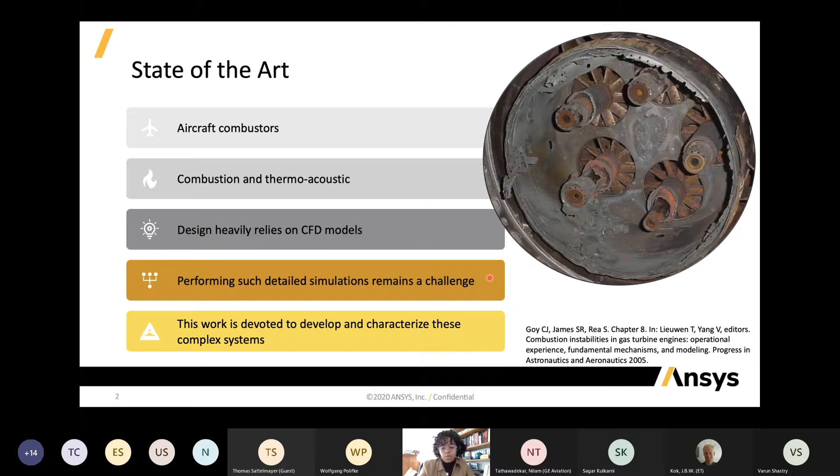Then my work here is devoted to develop and characterize those complex systems. My main focus is the combustion modeling and coupling with thermoacoustics, which are those unstable damaging behaviors. This thermoacoustic instability is derived from velocity disturbances that cause flame speed and burning area perturbations, causing also heat release oscillations inside of the machine, which also will come back leading to velocity disturbances.

This problem is not only present in big systems like combustors, but also in simple systems like domestic boilers or laminar flames, such as the inverted conical flame. And as previously said, it relies on dozens of chemical species for the combustion side, leading to high computational burden. And I will be here presenting the use of CFD and, as perspective, use of reduced order models to predict this flame behavior.

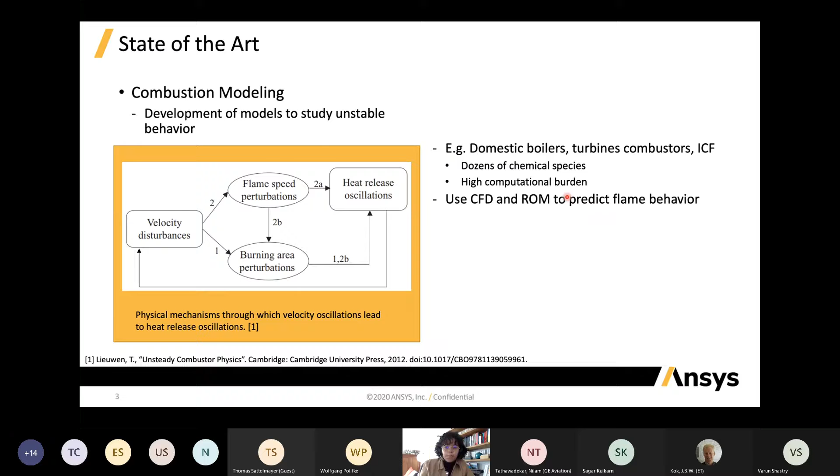So I'll be studying the inverted conical flame, also called ICF, and its geometry and domain used for developing my model with Fluent. So what is this inverted conical flame? It is a laminar flame with premixed methane-air fuel. It's a lean flame with equivalence ratio of 0.92. And it's a flame that is anchored in a central cylindrical rod, as we can see on the right figure here. It's an axisymmetric flame. And why I chose this one? Because even though it's a laminar flame, it is still prone to thermoacoustic instabilities.

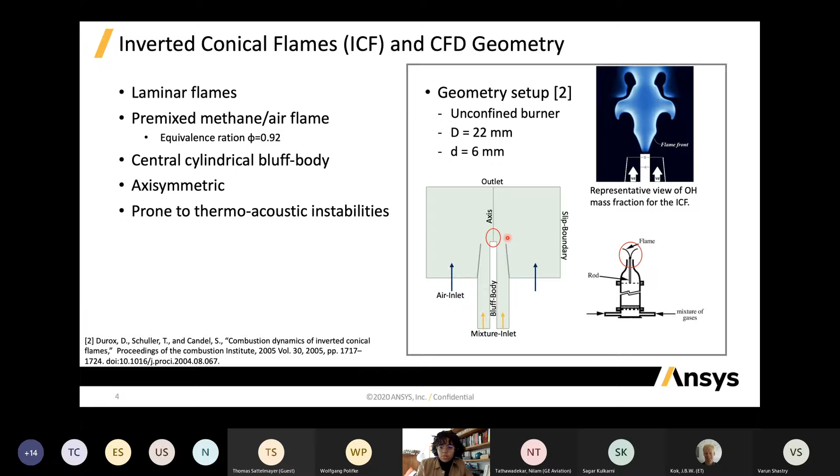So here I'm presenting the domain and the characteristics of my model, which is based on the experimental setup from Durox from 2005. As we can see here, it's my domain. There is an inlet of air, and on the center, the yellow arrow, the inlet of the mixed fuel. And in the middle, the bluff body. And in this region, marked in red, is where the flame will be anchored.

When we look at the profile of CH2, which is the smallest scale in the species properties of this combustion model, we can also obtain the flame thickness, since CH2 is a substance that is produced and consumed inside of the flame front in the combustion region. And this flame thickness is 120 micrometers. And also from this model, we obtain that the minimum mesh necessary for obtaining a valid model is 5 micrometers.

So now about our specific Fluent model. We are using a chemical kinetic model that solves volumetric reactions and uses the stiff solver with ISAT table, and again with the DRM19 kinetic mechanism. And our fuel and its compositions are given in this table here.

So to actually achieve the minimum necessary mesh size of 5 micrometers, we are using a well-known tool from CFD, the mesh adaptation tool. Since our domain for the simulation is big when compared to the flame characteristic size, we can use a characteristic base mesh of 100 micrometers. And with this adaptation tool, we can reduce the mesh size only in the regions where we are interested, so the region where the combustion happens. As we can see here, we are using a refinement gradient of 50 Kelvin per meter and a coarsening gradient of 250 Kelvin per meter.

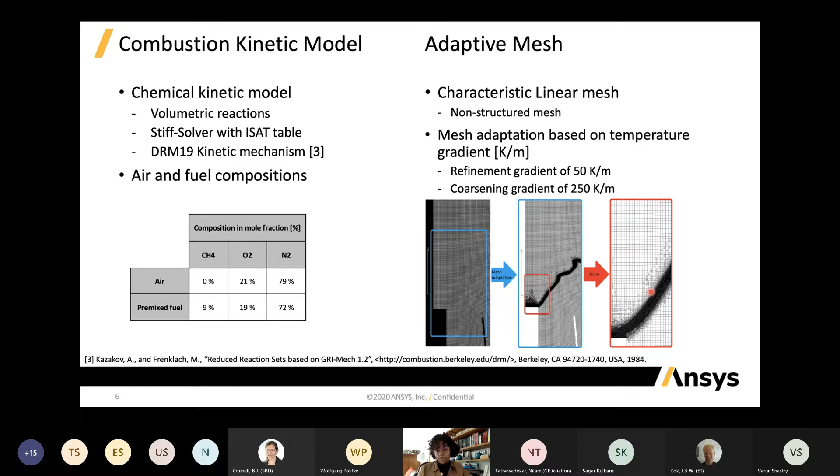And on the image on the bottom, I'm showing first the characteristic mesh without any adaptation. On the second figure, I'm showing the same region, but already with the adaptation. And we can see that the adaptation is made only on this small region, which is linked again to the gradient of temperature, so the combustion region. And on the last figure, I'm giving a zoom on this region so that we can see that the mesh is well refined and quite smaller than the characteristic mesh that we set in the beginning. And one additional piece of information here is that the mesh we achieve in the end is slightly smaller than the necessary mesh of 5 micrometers. So it's around 3 or 4 micrometers.

Then for my specific scenarios from the modeling I just presented, we are using a premixed fuel velocity inlet that is variable with time so that we can excite the flame, willing to, after that, obtain some information to compute thermoacoustic and combustion coupling analysis.

I'm using a harmonic function as shown here, where Vd is the mean RMS velocity constant that is also used in the experiment from Durox, with a value of 2.05 meters per second at the outlet of the fuel inlet tube, and an amplitude for the harmonic function of 0.14 meters per second.

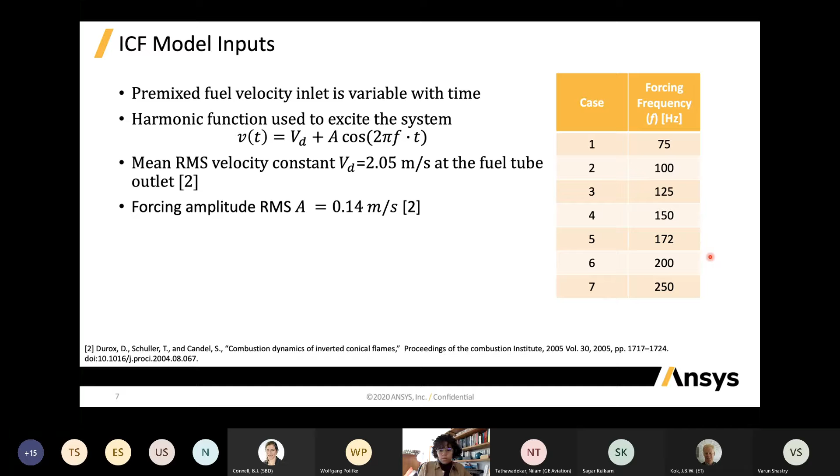So as I said, I want to, in the future, characterize the flame transfer function. So I'm exciting the flame with several frequencies, varying from 75 Hertz to 250 Hertz. And I'll be presenting the results for this model, these scenarios, in the following.

So the flame transfer function I'm using here, as I said, to characterize the flame dynamics in relation to the instabilities we previously discussed. And it allows us to relate the flame response to incoming velocity modulations in terms of heat release rate, Q dot, sorry, it's missing here, and in function of the frequency.

So here is the equation for the FTF, and I'm also using one hypothesis that the flame surface area fluctuation rate is approximately equal to the heat release rate, and I'm computing this flame surface area with the modeling with Fluent. And then we'll be further looking at the gain of the FTF, which is the modulus of the flame transfer function.

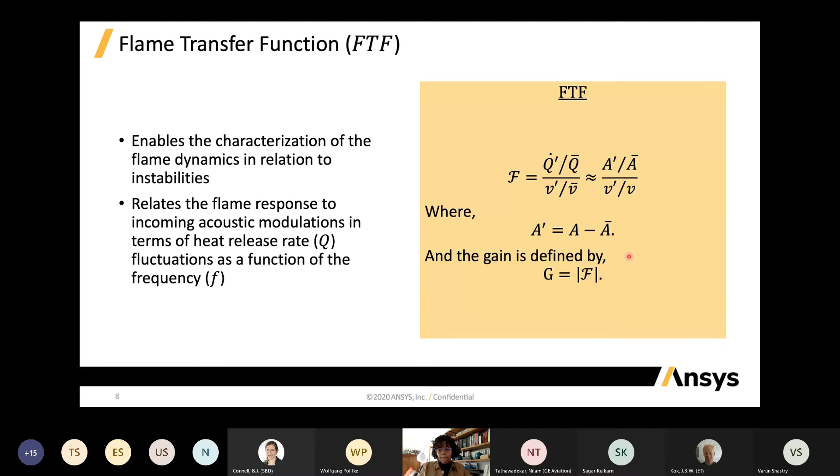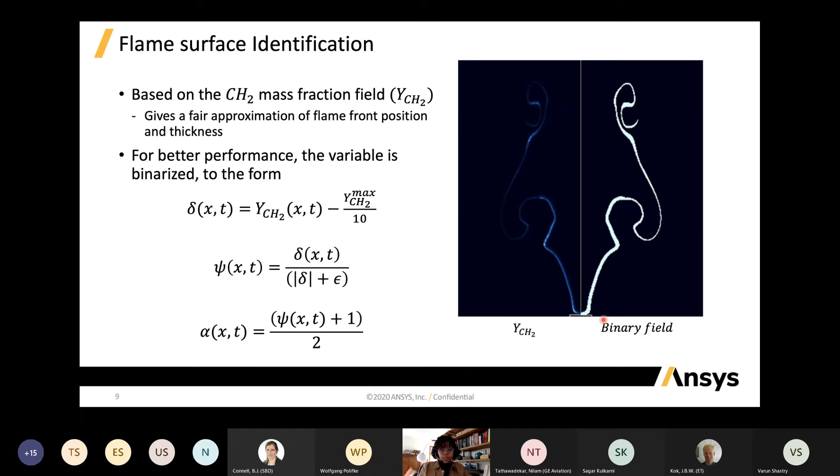Oops. Okay, oh my. I am so sorry for that.

Meanwhile, the higher frequency forcing is mainly a steady V shape due to these wrinkles that basically stabilize the flame. Then looking at the low frequency forcing, we can see that there are two main things happening on the flame. First is the wrinkle that is formed on the anchor point here on the base that develops along the flame front until it causes the pinch off of the flame on its tip.

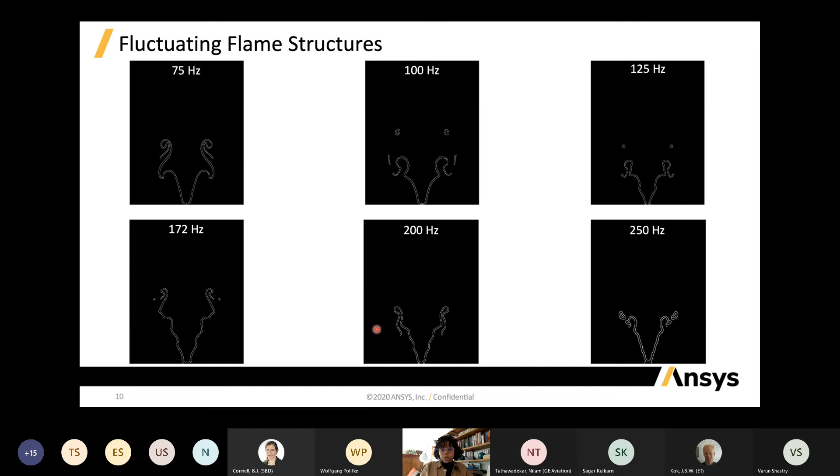Meanwhile, when we increase the forcing frequency, this behavior gets different. So to characterize that, the fast Fourier transform was developed for each of those signals.

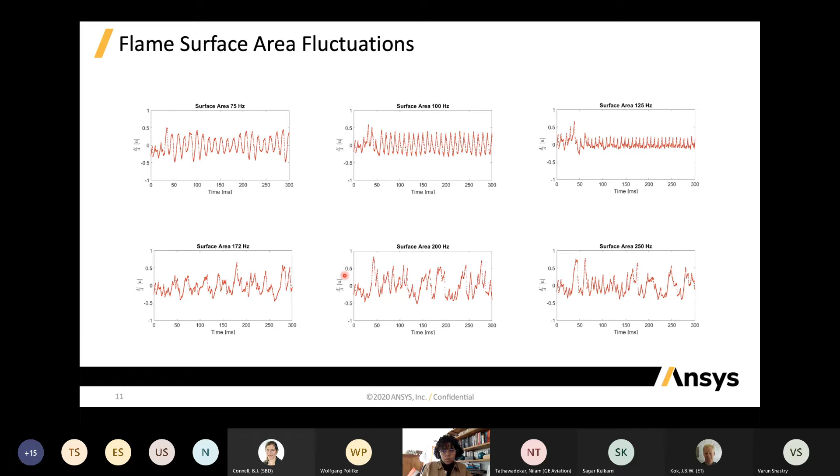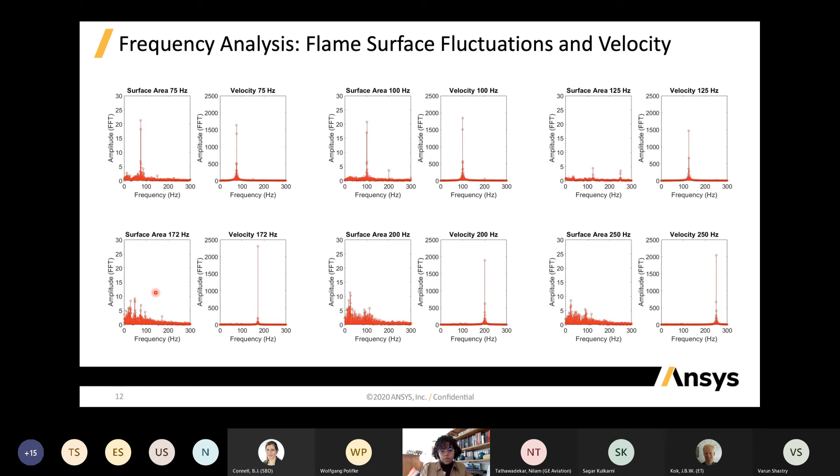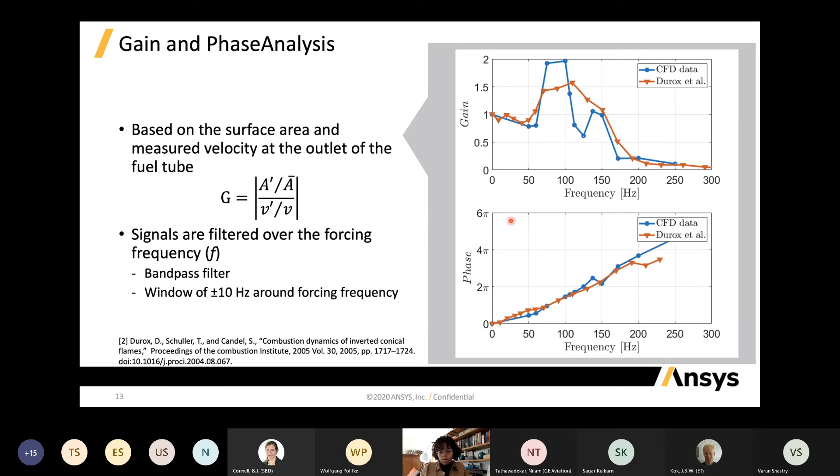However, our simulations have a high burden. It takes 2 or 3 weeks to compute using the gradient that I've explained in the beginning. So our perspective is to use the ROM, the Dyna ROM, to compute the reduced order model of the inverted conical flame with the data, and compute the flame transfer function with the model obtained with the ROM. This work is in progress, also in collaboration with Nilam and Michael from GE.

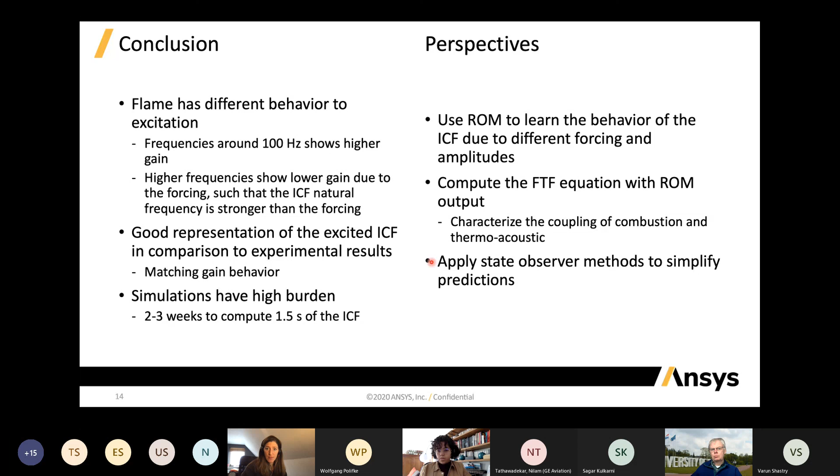And the third point of our perspective is to apply the state observer method that Niels talked a little bit about to simplify our prediction, also a work in progress at the moment. Then these are our already published papers that you can read if you are interested in this work.